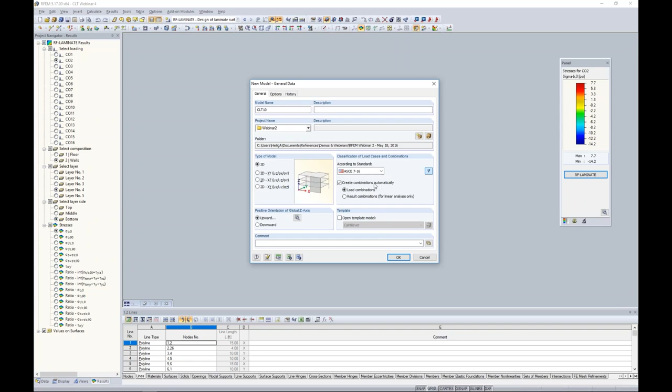The load combinations can be generated according to a standard. You'll notice we have the ASCE 7 2016 here. We have the NBC 2015, as well as many other international codes. You can always uncheck this option here, and that will allow you to manually create your load combinations instead. So once we've defined that, we'll go ahead and use the ASCE 7 2016 for our example today.

The program launches our file. We can see in the center portion here is our main graphical window. This is where we'll begin to generate the structure. Down at the bottom, we do have our tables. If you prefer to work with the program this way, you can import and export information to and from Microsoft Excel. We have our tools up here at the top, and we'll certainly be utilizing those today.

Over on the left, we have our project navigator. As we begin to generate this model, all of our input data is going to be available within this project navigator. If we scroll down, here is a long list of all of our add-on modules. Here's RF-LAMINATE in particular for today. Now, once we do run an analysis, our results will be available within this project navigator.

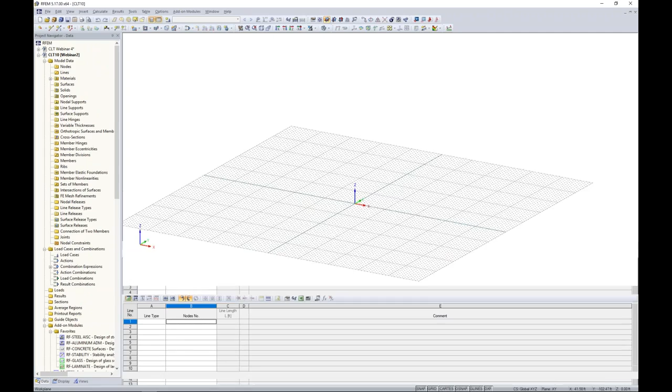To begin with, I want to start off again with just the basic geometry of our structure within the main program here, RFEM. So I'm going to draw a new line element, and it's exactly as you think. It's just a line element, something you'd see similar in AutoCAD. It doesn't have a cross section assigned. So what I'm going to do is to give the structure its basic outline here, and we're going to snap to a few different points.

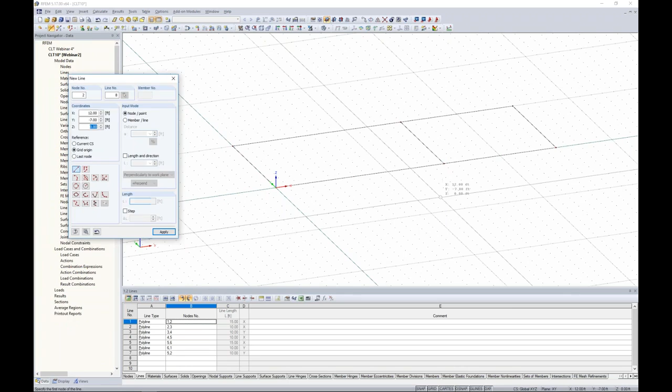And finally, closing this gap, we can right-click, and we can also repeat the new line by right-clicking, and maybe I want to add an intermediate wall here. So once I'm done with that, you can see, again, nothing more than those one-dimensional line elements.

Now, what I want to do to create the walls of this structure is to right-click on one of these lines, and we have the option to extrude the line into a surface. So this would be the 2D surface that makes up my wall element. Now, I can set the height as 9 feet. The thickness and the material don't matter right now. Steel A992 with a thickness of 8 inches is completely fine. The reason why, this is just essentially a placeholder.

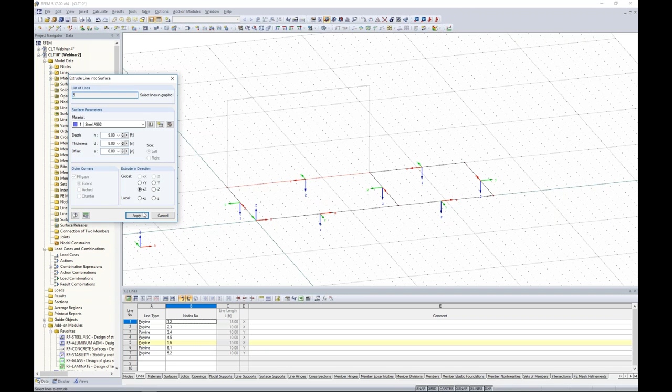We're going to define our CLT compositions later on in the add-on module RF-LAMINATE. So as a placeholder, we can just leave these as they are. Now you'll notice that 1D line element was now created into a 2D surface element. The same thing can be done for the rest of these line elements to quickly create our walls.

Now, by all means, you can draw the surfaces individually as well, which is what we'll go ahead and do for our ceiling elements here for our first level. So for this, I can just easily change my drawing grid up to the top of the structure, and I'm going to generate surfaces here.

So this time I will draw in those surfaces. The material, again, doesn't matter. Steel A992, thickness doesn't matter. It's all going to be overwritten later. So I click OK. Now this allows me just to snap to a couple of points here.

Now I wanted to place two panels side by side just to show you that panels don't necessarily need to span between certain walls, but they can be set up like this for situations where you are not able to span a single panel between walls.

Now, as for our second room over here, I will just create a single surface element and we snap from one point to the other. So that is essentially defining all of the wall and surface floor elements for our first level.

I'd like to go ahead and put in some openings here. So eventually we're going to create a second level, so I'm going to need some type of opening to get from the first level up to the second level with my stairs. So just like we drew in a surface, we can also draw an opening.

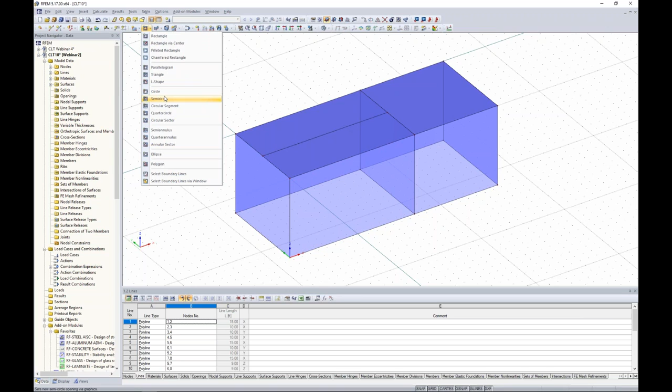In our toolbar up here at the top, you'll notice that we have many different options for shapes of openings. It doesn't necessarily have to be a rectangle, but circles, semicircles, ellipses, or even a polygon to draw the shape yourself is available. So for this one, we will just use a typical rectangular shape, and we can go ahead and just snap to a couple of points here to add in that opening for our stairs.

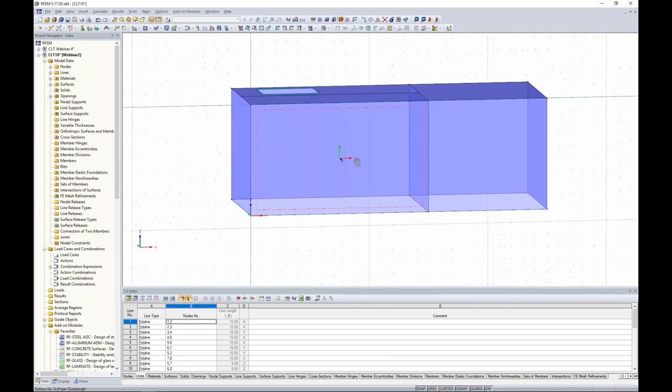Now, as far as the front of the structure, we want to change around our drawing grid here and snap to the front. And we'll go ahead and add in an opening for our window to begin with, as well as maybe an opening for a door.

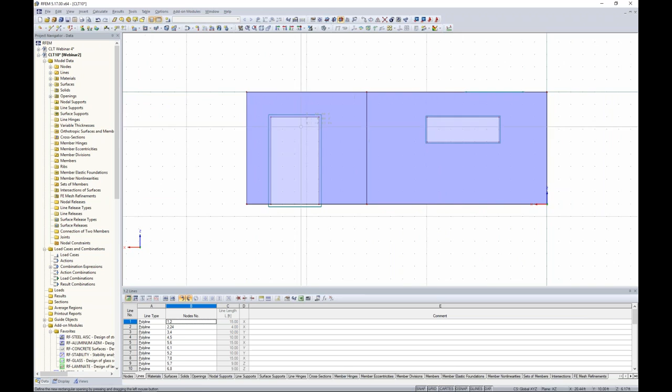So once those two openings are created, we'd like to do something similar to the back of the structure. Once again, just changing that drawing grid to the back, we rotate around the structure and just arbitrarily add in a rectangular opening for the window.

Lastly, we need a way to get in between the two rooms, so we'd like to add a door opening. So we'll go ahead and change around the drawing grid once more, snapping to that center point, and then we can add in our opening.

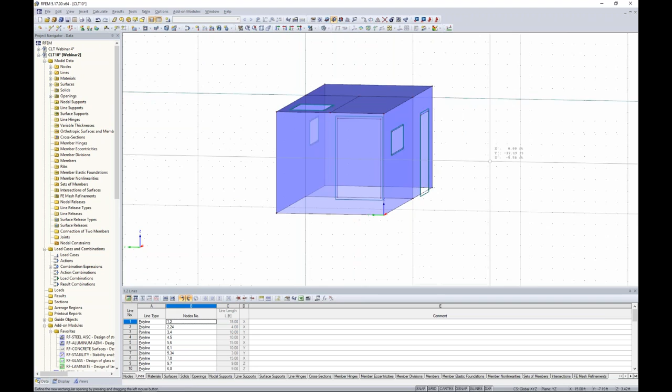You'll notice the benefit of this drawing grid, that it really doesn't matter where I'm snapping to within the model to draw all these openings, but the drawing grid limits me to where those openings are actually placed on the structure. So all of the surfaces are pretty much done.

And I'd like to generate a second level with basically the same identical layout. So what we can do is just highlight everything, and we could use our Move Copy tool, but what's nice is we also have our drag and drop feature within the program. So with this, I highlight everything, I hold down my Control key, and then I can snap from one node up to the top to create a copy with that drag and drop.

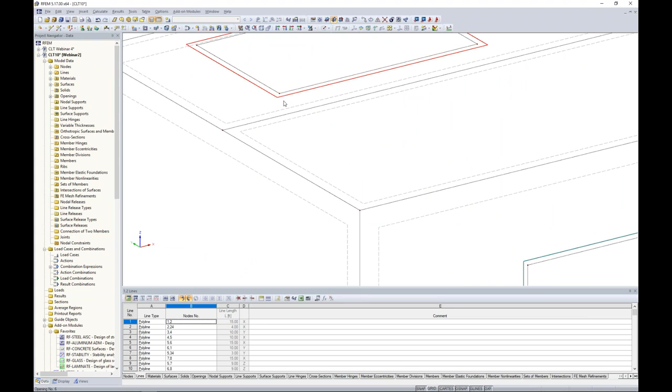So now you can see everything was copied up to the second level. Now I do want to delete a couple of these openings. This is probably easiest by turning this into wireframe view. I can zoom in here, select my top opening, just hit the delete key.

Now the nodes and lines still remain that made up that opening, and realistically you could leave these in here. They're not going to affect your analysis, but if you just like to keep the model a little bit more clean, we can just go ahead and select those with our selection tool and hit delete on our keyboard. Same thing goes for our opening of our door. We probably don't need this one in here, so again, just highlighting and hitting delete on our keyboard.

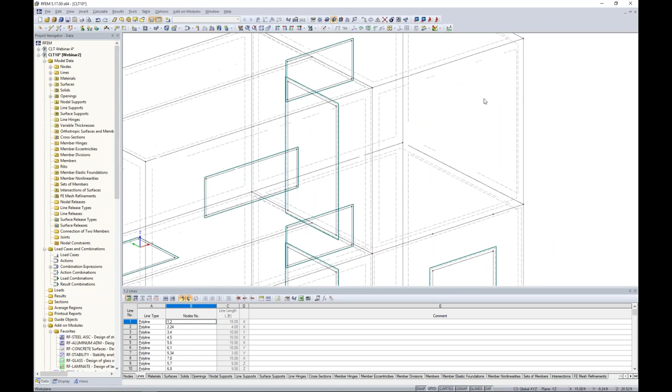So we're now done with all of these surfaces for our simple building today. Now, let's say that we'd like to model some type of beam element that will hold up the two panels here, spanning a fairly long span of 15 feet.

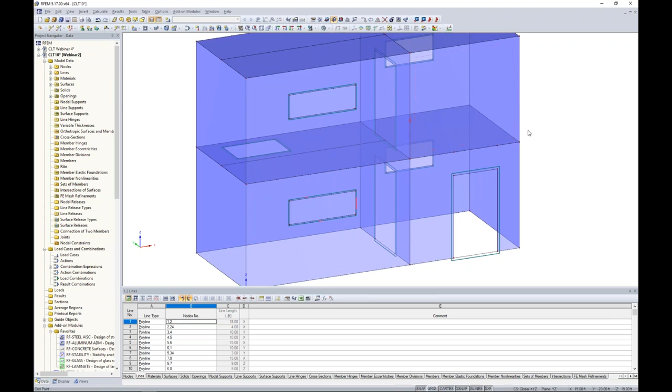Just for example purposes, let me hide this second level here by changing the visibility and hiding the selected objects. So where I want to place that beam is below these two panels that are spanning a little bit longer. So how can we do this?

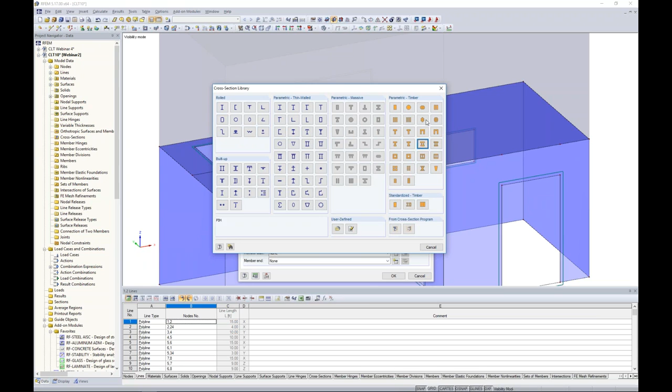Well, we can start off by drawing a new single member. Now the member type is set to beam, and we can launch our cross-section database. Here are all of the different cross-sections available in the program. You'll see all of the sections from the standards, AISC, CSA standards, but in particular today we'll be working with these parametric timber sections.

So we can choose the rectangle, set the width as 6 inches and the depth as 10 inches. The material is also set within this same dialog box. Now, today I want to use a glue-lam member.

So here I can import the material from my library. And over on the left, we have some filters, so we'd like to filter according to timber. We can choose North America, and here you'll see both the AWC and the CSA.

Then we have our long list of all the materials directly from the NDS standard. You can further filter according to the tables directly from the back of the NDS. For example, glue laminated softwood timber, stressed primarily in bending, we choose that from table 5A. Now our list is a little bit smaller.

You can always create favorites groups, which is just a way to add a handful of materials to a favorites group, so you can quickly access them rather than having to change these filters and sift through these materials every time. For example, I added my material today to my favorites group that I'll be using within the webinar. So here are all my material properties for that particular selection, and I choose OK.

So now we click OK through our dialog boxes, and it's as easy as choosing a point to snap on our structure. Again, the program has nice AutoCAD-like features, so the point that is perpendicular to my opposite node will automatically be highlighted - these are called O-snap settings, something you'd see similar in AutoCAD. So our beam element was created here.

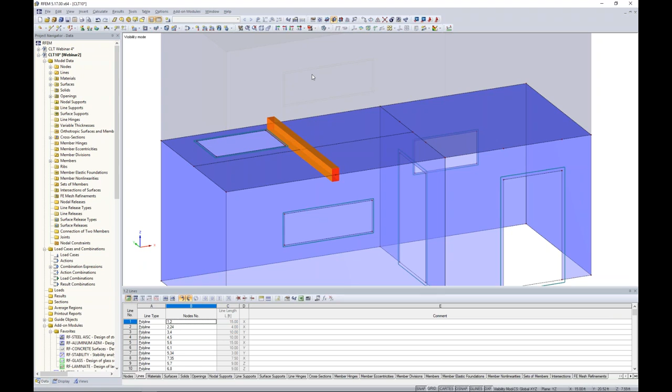Well, what we can do is to utilize something called a line release. So turning this into wireframe view, let me just break apart this member here so that member is now still spanning as a continuous member, but I broke it up into 2 segments where each panel occurs.

To add in a new line release, we can either do that within our project navigator over here - you can see line release types, or we can choose it under the insert model data, and then you'll see line release types down here. So utilizing the project navigator, we right click and choose new line release.

Now the program asks us to select the line, so I can choose my first initial line here. Then we choose the line release type, so I create a new type. You'll see here we have translation, but this is where we want to release that rotation.

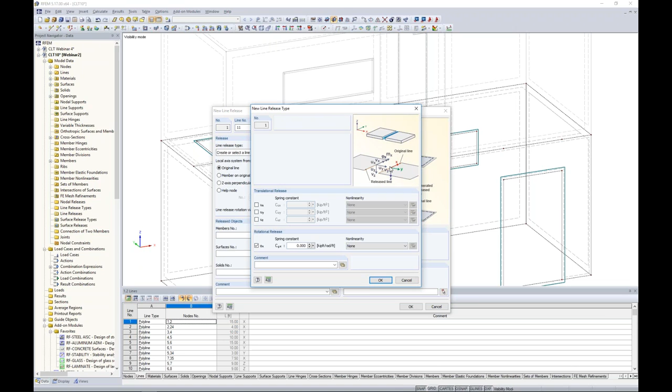Now, these axes, X, Y, and Z, are based on the local axes of the line. It is not the local axes of the beam element, and it's not the local axes of the panel, but rather the line that they share itself. So we can select the option to completely release that rotation.

The program also asks us, well, what is the released object? So we can select this surface on the far end and click OK. So now you'll see this line release symbol shown within the model.

If I right click, I can repeat that same line release, this time choosing the other line. My line release type was already defined, and we'll choose our surface closer to us, and I click OK, and now I'll see that line release to release that rotation between the 2 surfaces and that beam.

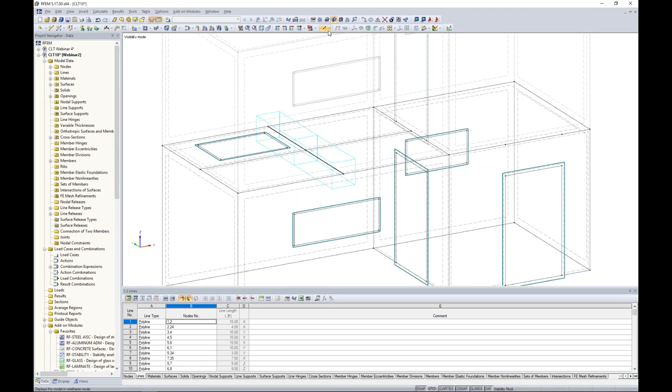The other thing to take a look at is we most likely want to drop this beam element below our surfaces.

We want to account for that eccentricity because it is holding up the beam element or the panels itself. For this, we can easily select both members for the beam. I double click it, and here is the Options tab. Now the Options tab has member eccentricity, and I create a new definition type. So what I could do is manually define what is half the thickness of my panel, what is half the depth of my beam, and manually put in that eccentricity. But rather, the program's smart enough to do all of that automatically for us.

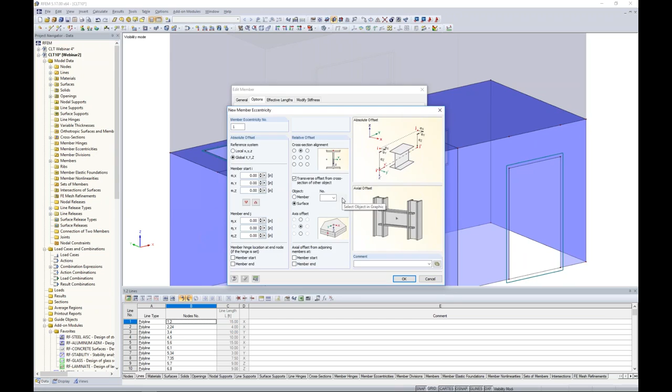So what we can choose here is the top of the beam member point, and we can offset it from the bottom of the surface. I just graphically select one of these surfaces, I choose the bottom, and I click OK. So now we can see visually that beam dropped below that panel.

What's nice here is that eventually we're going to change these steel panels to CLT. Our thickness is inevitably going to change too, so instead of having to come back here and adjust the eccentricity, the program will automatically update everything for us.

Okay, so the basic geometry is now complete. The last thing we need to do before loading the structure is to support it. At the bottom of my walls, I'd like to add in line supports. So once again, with our tools up here at the top, I can choose new line support.

We have two default options, hinged or rigid, but we can always create a new line support ourselves. Here you'll see the 6 degrees of freedom, 3 in translation, 3 in rotation. We have the option for partial fixity, so if you have something that's not fully fixed, not totally released, but somewhere in between, then you'd probably want to add in here a spring constant.

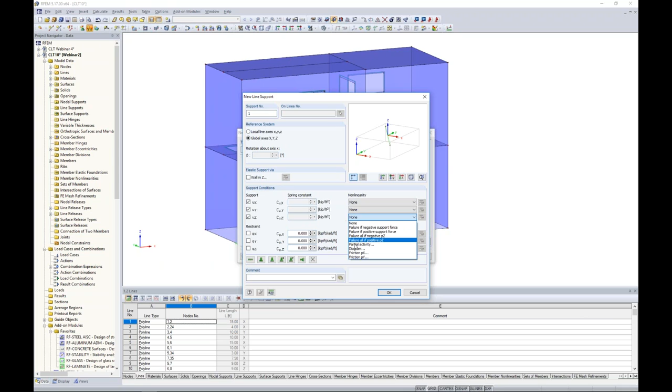And lastly, nonlinearities. Nonlinearities can be extremely useful for wood panels and CLT panels here. The reason why is that maybe in compression we would like the wall to bear down on the foundation, but with any uplift, we'd like to release those force transfers, and instead model in there some hold downs. So that's where those nonlinearities would come into play.

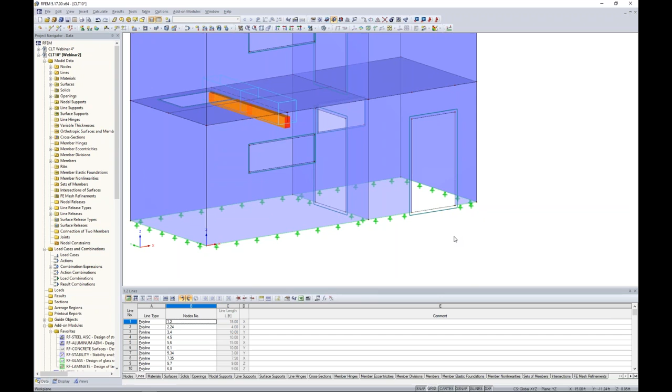Today we'll just be utilizing a simple hinged line support, and we can select all of our lines at the bottom of the structure. Now, one thing we want to do is select the two line supports where our door openings are and delete those. The reason why is the program will give us an error just saying that we're trying to support something that doesn't exist, so we'll just preemptively take care of that.

So geometry and supporting of the structure is done, so we can move into the basic loads. For this, I'm going to go into a new load case. Here pops up my Edit Load Cases and Combinations dialog box. The first load case we're going to define is dead load.

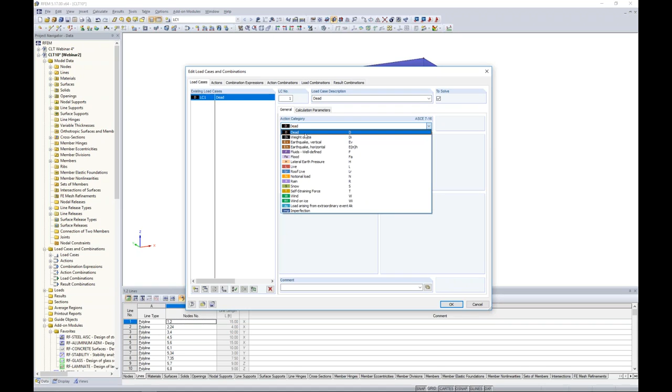The action category is set to dead load. This is important because this is how the program knows which load factors to assign according to the ASCE 7-2016 that we selected at the beginning of the model. The self-weight is automatically activated for dead load.

We create a second load case. We'll call this one live, with the action category set to live. Self-weight is unchecked here, we don't want to account for it twice. Third load case, we'll call this one wind X with the action category set to wind. And finally, our last load case will be wind Y, with the action category again set to wind.

So the combination expressions tab is just going to show me that I'm going to create both LRFD and ASD load combinations, again directly from the ASCE 7. The load combinations tab actually lists out the individual combinations.

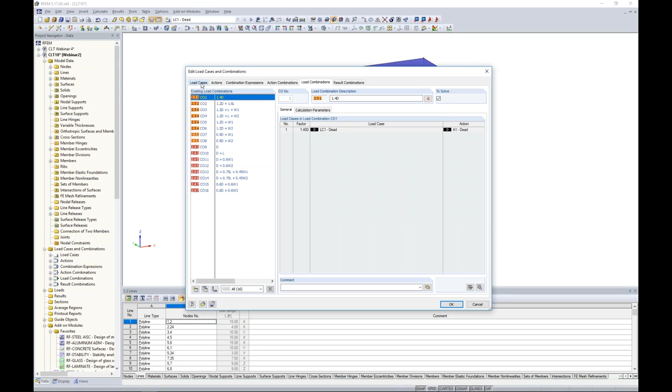So here are my LRFD load combinations in orange and ASD in red. Now these only include the load cases that I've defined on that first tab, which is dead load, live load, wind load. I won't see additional load cases such as snow load when I haven't defined them on that first tab. The result combination is an envelope solution, so we have our LRFD envelope solution here for our first result combination, and ASD result combination here. This will just show us the max and min out of all of these load combinations combined.

So we've completely set up our load cases and our load combinations, but we need to actually place the loads on the structure.

So we'll start off with dead load, and here we'll just apply a basic surface load, once again accessing this tool at the top of our model. The surface load direction will be set in the global Z direction. We can see those global axes here with the magnitude set at negative 0.1 kips per square foot. I can just click on those surfaces, or highlight the first level here to apply that same load. You'll notice that the openings are automatically considered, and our dead load is complete.

Same thing for live load, same concept. We'll go back to our surface loads here and simply change the magnitude to negative 0.05 kips per square foot, and we'll only apply this to this first level here.

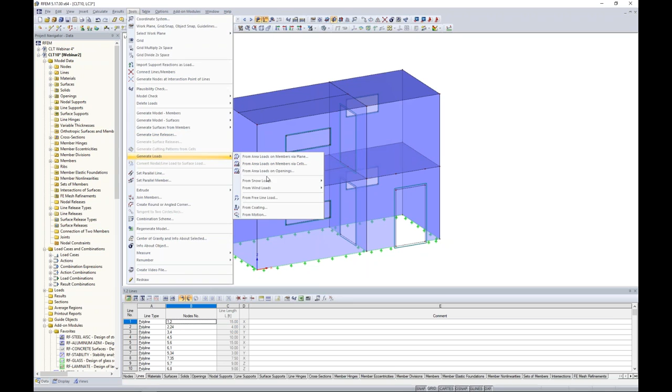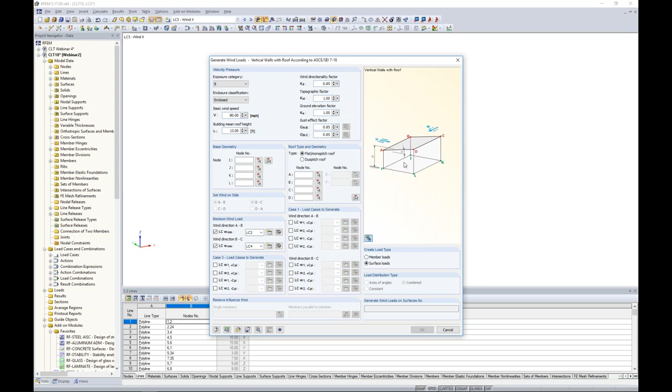Moving on to wind load, under Tools, Generate Loads, for both snow loads and wind loads, we do have the option to generate these according to ASCE 7-2016. The wind loads only take into consideration case 1 and case 3 from the standard, and realistically, this is for basic rectangular structures only. Anything outside of that, you're going to have to manually apply the loads. This will apply them as either surface loads or member loads to the external elements of the structure.

So it won't be placed on a diaphragm as a nodal load, but rather the actual loads themselves. Just keeping with a simple example today, we're going to apply basic surface loads for our wind in the X and Y. Going back to our surface load, all we're doing here is changing the load direction, and the magnitude can be set at 30 pounds per square foot.

Now, you can vary the load linearly in the vertical direction. For example, if we want higher wind load at the top, lower wind load at the bottom. And these loads don't necessarily have to be applied to the entire surface either. We have free loads, which allow you to apply surface loads to only portions of your surfaces. So the possibilities are really endless when it comes to loading here.

So we just apply a basic wind load in the X direction. Now, I'd like to maybe have a small suction load on the other side. We'll simply change the magnitude to something more like 10 pounds per square foot and apply that on the other side of our structure. So pretty basic application today.

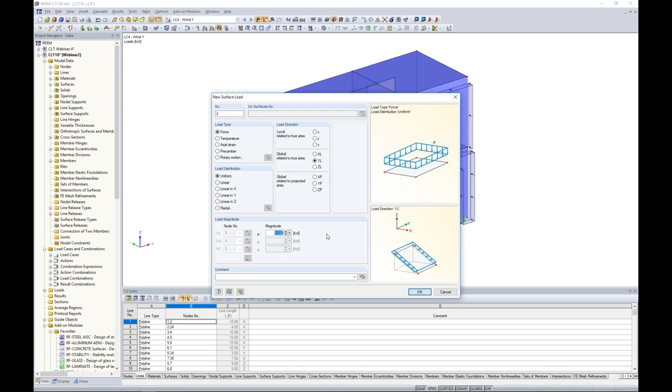Moving on to wind in the Y direction. Same concept, just changing the load direction to Y and the magnitude to 30 pounds per square foot. We click on these front surfaces here. Again, you'll notice that the windows and door openings are automatically accounted for. And one more time, a small suction load in the back, 10 pounds per square foot, and we can always highlight all of these surfaces at once to apply it to the back side of our surface. So that's the basic loading.

Now we can cycle through these load combinations here to see them all applied at once. What's also nice is that these load factors are automatically considered in the graphical interface here when we're displaying the loads on the structure.

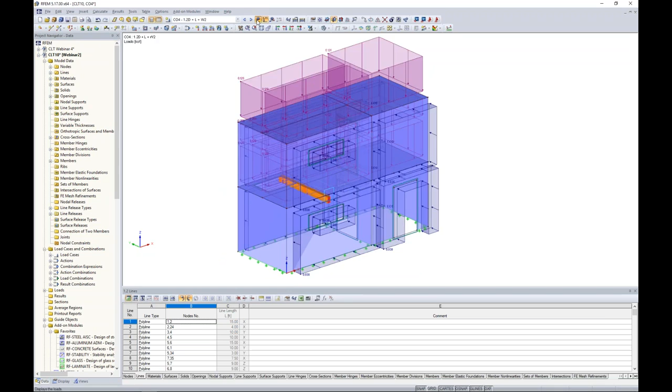Okay, so you would think that, alright, we must be already ready to run our analysis, but remember, we still have steel surfaces here. We haven't even touched the definition of our CLT panels. So this is where we want to launch the add-on module, RF-LAMINATE. I can access this add-on module within my project navigator here, and we double click it, and up pops a dialog box. The add-on modules are nothing more than a dialog box within RFEM.

Everything that I've already modeled and loaded so far will be considered. I don't need to redefine any of that information. The only thing that I'm defining here is information specific to the NDS standard and to cross-laminated timber. So I want to fill out a few things here before I explain what's going on with the RF-LAMINATE add-on module concept. The first thing we'll choose here is design.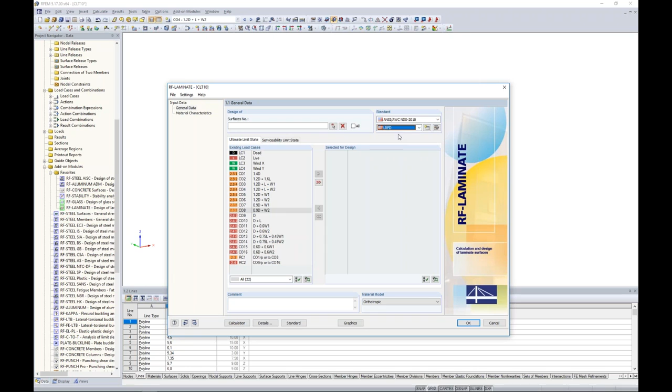You'll see the NDS 2015, and as of our last release, we added the NDS 2018. We have both ASD and LRFD. Maybe today we utilize LRFD. Our surfaces, we can choose all the surfaces here, so you could select some graphically if you only wanted to design a few, but for today, we're going to design all of them. Our ultimate limit state combinations, we will choose all of our LRFD load combinations, and for serviceability, we will choose ASD because again, we can check deflections.

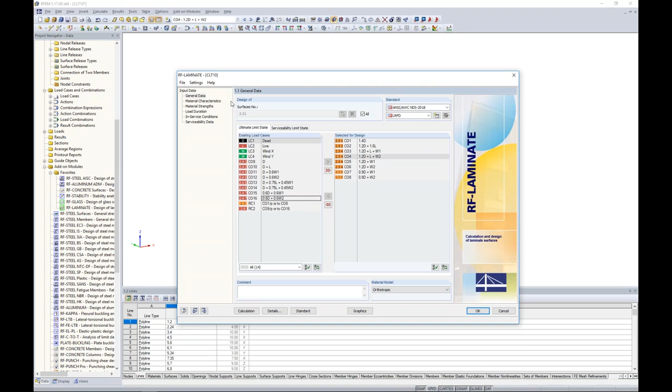So the material characteristics, this is where we define the CLT compositions, those individual layers that make up that CLT panel.

And this is where I want to go back to the PowerPoint here to explain what's going on behind the scenes. So with RF-LAMINATE, as I just mentioned, we're going to define each individual layer of that panel. Now, each layer has its own stiffness matrix.

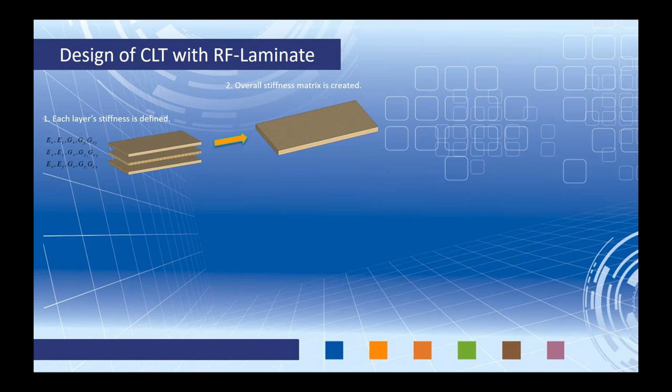So what the program will automatically do for us once we have filled in all of the layers, it will generate an overall stiffness matrix. And you can see a sample calculation here, D11 of that stiffness matrix based on all of the layers that we've entered in. It will export this global stiffness matrix back out to RFEM, and this is where we're going to see CLT panels instead of those steel surfaces that were our placeholder.

It's going to run through all of those load cases, load combinations, and eventually we're going to get internal forces. These internal forces for our CLT panels are going to be brought back into RF-LAMINATE, where the stresses are distributed to each individual layer. So maybe a cross-section profile here of a CLT panel for bending stress might look similar to this. And finally, we're going to separate those stresses into tension, compression, bending, and shear components.

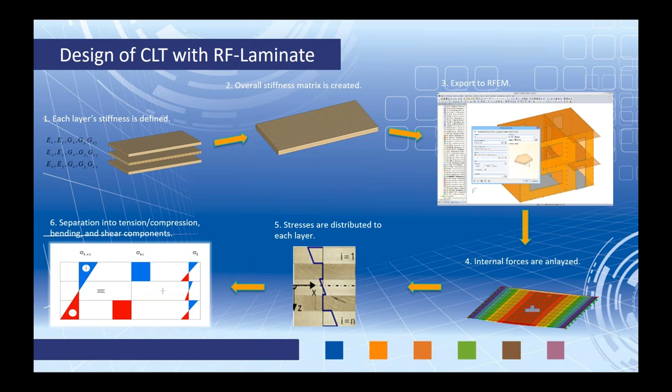We're going to compare them to our strengths of our CLT based on the NDS standard, and we're going to give you a design ratio. So that's essentially what's happening underneath the hood.

Now, as far as the 2018 NDS updates, what exactly changed? In reality, there were only 2 revisions in Chapter 10 for CLT. The first being the format conversion factor K sub F, and this is applicable for the rolling shear design value F sub S within LRFD design.

Now, within the 2015, this was 2.88, and it was simply adjusted to 2.0. You can see this within Table 10.3.1 of the 2018 standard, and within RF-LAMINATE, when you have the 2018 selected, it will automatically take into account that small change.

As far as the second change, it actually is a little bit more complex. So deflection calculations are run according to Section 10.4.1. And what the NDS code tells us is that the apparent bending stiffness must be adjusted to account for shear deformation, and this is what you're seeing over here with this equation.

So in order to calculate deflections, we should use this stiffness. And this is pretty much an approximate equation, done by reducing the bending stiffness EI with a shear deformation adjustment factor K sub S. So we can see all of that here.

So this equation was slightly modified, and it matches up a little bit more closely to the CLT handbook, but that's really the only second change.

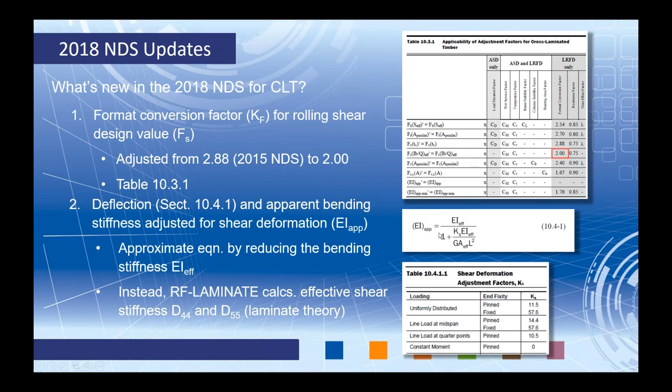Okay, so let's jump back to our example here, and let's begin by defining our first composition. So what we'll first define here are our floor panels. So we give this current composition a name. We choose these surfaces, which we can choose them graphically here. We'll choose our roof level and our first floor level, and I click OK.

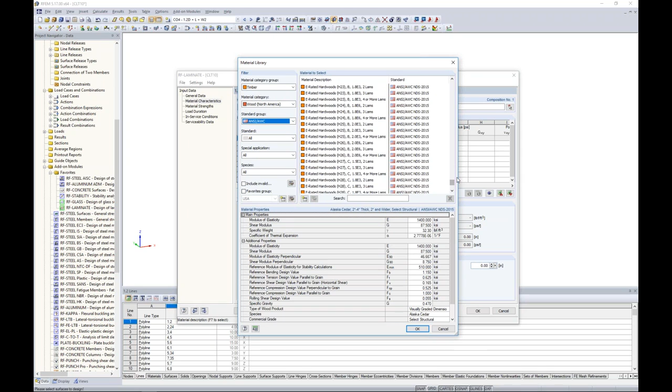Now, as far as the different layers, you can individually choose these layers here by going into our material database, and this is what we saw similar in RFEM. The material category can be set to Wood North America. We have AWC and CSA here, and then we can choose one of these materials that's applicable for our first layer. So that's one way to do it. We can set the thickness, and then all of these properties will be generated automatically from that particular material.

Another option is to bring in imported layers from our library. Within this library, you'll see we have a handful of producers we've reached out to. They gave us information for their products created for CLT, particularly for the Canadian and US market. You'll see here the APA.

We'll see Nordic Structures, Structurlam, and SmartLam. You can always import one of these products directly from the manufacturer if you're utilizing one of them. Today we'll be using the APA for the US, Grade E2, thickness 6 7/8. Now you can see all of these layers were automatically populated within this dialog box.

If you create your own individual layers, you can always save them and bring them up for a future model within RFEM. So there are a lot of options here — you don't necessarily need to individually define those every time.

The modulus of elasticity, shear modulus, specific weight, and everything is automatically populated here, based on the producer we're utilizing. The material strengths are also automatically populated — here are strengths for bending, tension, compression, and shear.

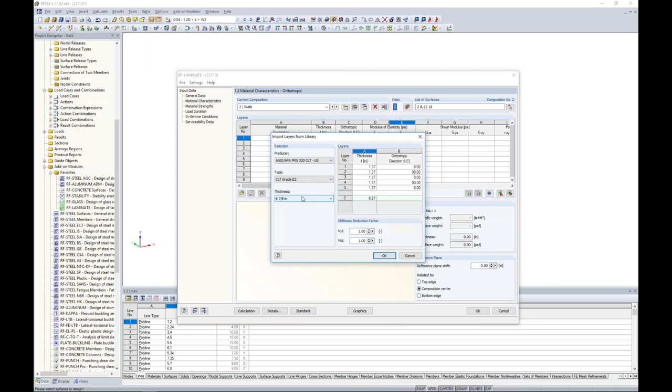We go back to the add-on module and populate from this same database, using the same grade E2, 6 7/8, which is fine for our case today. And I click OK.

One thing I'd like to point out is this option here to edit the composition details. This is applicable for both the floors and the walls, and there are quite a few options here to turn on or off or adjust.

You'll notice we have consider coupling, cross-laminated timber without glue at the narrow sides, shear failure in the glued contact surfaces, as well as stiffness reduction factors. So to explain all of this — although it looks pretty simple, it's actually fairly complex what's going on in the background of RF Laminate.

I'm going to jump back to the PowerPoint to explain some of these settings. They're incredibly important for us as engineers because we need to input the right information in order to get a correct analysis.

The first option is consider coupling. This is automatically turned on by default, and the reason is we're making the assumption that these layers are glued to each other at both the top and bottom.

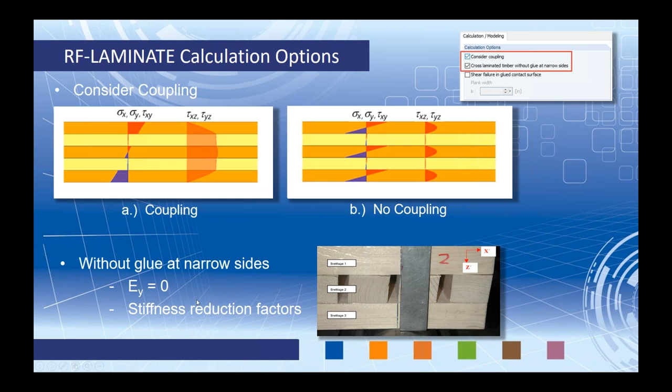When you have this option checked, we'll automatically set the modulus of elasticity in the local y direction of the panel to 0, assuming you have no stiffness in that direction. With that said, those stiffness reduction factors also need to be adjusted, which takes us to our next slide.

Without glue at the narrow sides, it's strongly recommended that your K33 and K88 stiffness reduction factors be modified — K33 for torsional stiffness, K88 for in-plane stiffness. The NDS and the CLT handbook don't give much information on how these should be reduced when we don't have glue at the narrow sides. So I pulled this information from the Austrian Annex, which is the Eurocode EC5.

I think we all can admit that Europe is a little bit more advanced when it comes to CLT design, simply because it's been around a lot longer than what we've seen within the US or within Canada. So I think it's perfectly fine to refer to the Eurocode when there are portions in the NDS or CSA that maybe aren't so complete.

Within the Austrian Annex, we have some simple equations for K33 and K88, those stiffness reduction factors. This is an Excel file I got from one of my colleagues, and what it allows us to do is put in the total thickness of our panel, the number of layers, and the board width, and it calculates K33 for us. This is the value we want to put back into RF laminate when we are not considering glue at the narrow sides. Same thing goes for K88.

By default, these are set to 1.0 even when you have this option checked, simply because there isn't any guidance given to us within the NDS standard. So again, it's strongly recommended to make sure you reduce those stiffnesses.

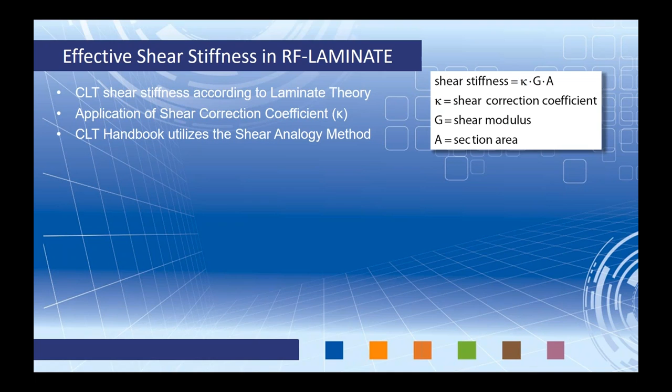With this, we're going to apply a shear correction coefficient. The CLT handbook actually utilizes the shear analogy method, which is different than the laminate method. Both of them eventually come up with a reduced shear stiffness, and that's ultimately what matters. Either one, by theory, is probably considered fine, but within RF laminate we're going to use the laminate theory, applying the shear correction coefficient to our shear stiffness, G and A.

Now, when we're looking at a homogeneous rectangular section, it's pretty common to set this shear correction coefficient to 0.8. We can see the shear stress distribution as a parabolic type function. Well, with CLT, we don't have that parabolic type function because it's not a homogeneous section.

Therefore, through research, there are some recommendations on what to use for that shear correction coefficient, whether it's 3, 5, 7, or 9 layers — we have some ranges here to set that to. But the question is, if I have 5 layers, like my example today, what exactly do I set this factor to within this range? Either the low end or the high end? What happens if I have 11 layers? What do I use then?

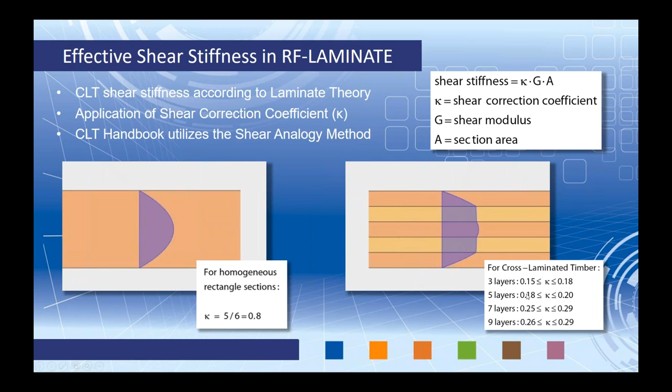So we will actually take you to the next slide to show you how these shear stiffness calculations for the XZ and YZ directions are calculated according to general technical regulations. Here are the equations for the shear correction coefficient, and we can see how that shear correction coefficient comes into play when calculating the D44 and D55 stiffness matrix entries within the CLT panel.

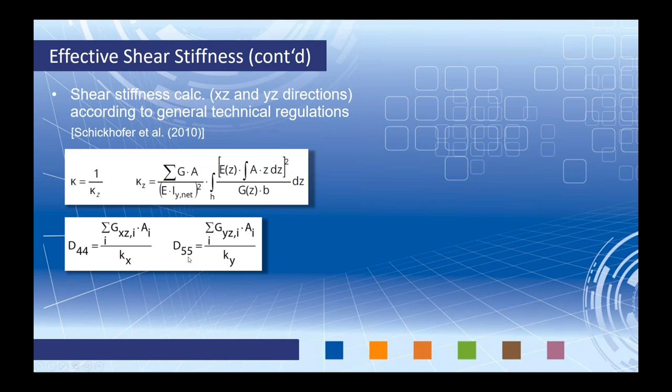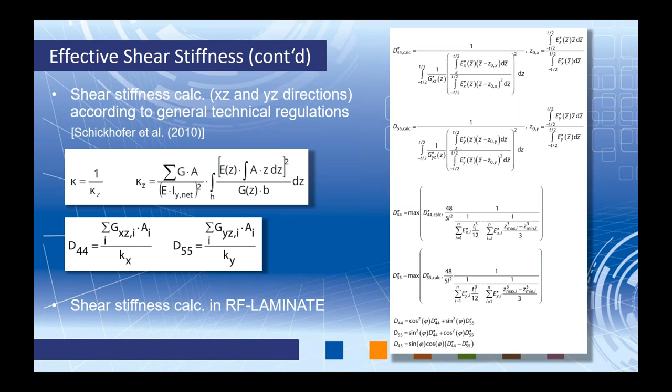Now, within RF laminate, here are the complex equations that go into calculating D44 and D55 — this is how the module calculates those stiffnesses. This is all within our help manual within RF laminate, so you do have access to all these equations and the theory behind the module. I'll show you in just a minute how you get the values of D44 and D55, and you can back-calculate to come up with the shear correction coefficient for that particular panel. All of that is done automatically, which is why you rarely will need to adjust the shear adjustment factors for K44 and K55, because it's already being done underneath the hood.

Finally, the last option we have here is shear failure in glued contact surface. This is for a new torsion check, just added into the program within our last release. It's mainly for wall elements which are loaded in plane — I think we can imagine with gravity loads and wall elements how torsion could potentially be a concern.

It's considered without glue at the narrow sides again. One suggestion is to make sure we set our FE mesh within our model to approximately the same size as our board or plank widths. We'll be doing that a little bit later on in our example, but it's important because your results could be a little bit skewed if you choose an FE mesh too small or too big.

So just something to keep in mind - this verification comes from the Eurocode EC5 2010 version. The NDS and the CLT handbook don't mention torsion and don't go into detail about how to take that into consideration, so we pulled these complete interaction equations from the EC5.

So what we can do is activate the shear failure, and you'll also want to turn on your results for the torsion checks. These interaction equation results will now be displayed in RF laminate, but we have to manually turn those on. They're still going to be calculated - it's just that you can see how many options here you can view with your results in the laminate module. We don't want to overwhelm you, so we'll be sure to do that as well.

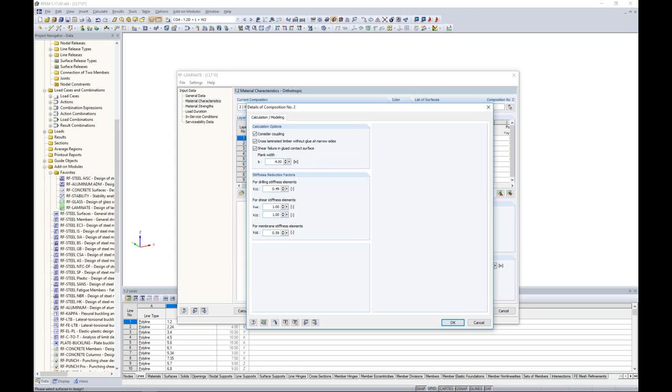Okay, so we're finally ready to jump back to our example, and here we are back to that original dialog box. So I'd like to set the plank widths to 4 inches, and for my walls I want to reduce that stiffness to 0.49 for my torsion, and for my in-plane stiffness 0.59, and that was all based on the PowerPoint that I just went over, and I click OK.

So now for my walls, I've only made those changes to the walls. My floors, which we can pull up in here, remain unchanged - I'm not applying those stiffness reductions. But for each individual layer, I can view its stiffness matrix here.

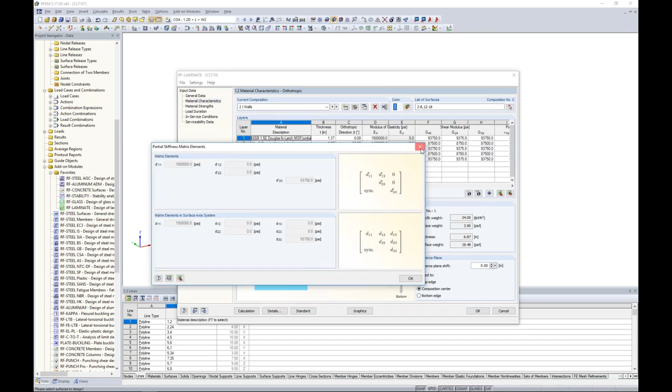And just like what I mentioned, the program is automatically creating my global stiffness matrix here for the entire panel. So here's my D44, my D55 entries that I mentioned. You can eventually back calculate to see what that shear correction coefficient is, but everything is done underneath the hood, taking into account those adjustment factors.

As I mentioned, let's take a look at the material strengths here. Because we're now taking into account torsion, we will see a torsion strength added to our material strengths table. This is something maybe you want to get from the manufacturer - this is just some arbitrary value. It's not something that came from the manufacturers that we populated from these layers, because we don't have that information, but rather it's something you need to manually fill in. Everything else should be good to go.

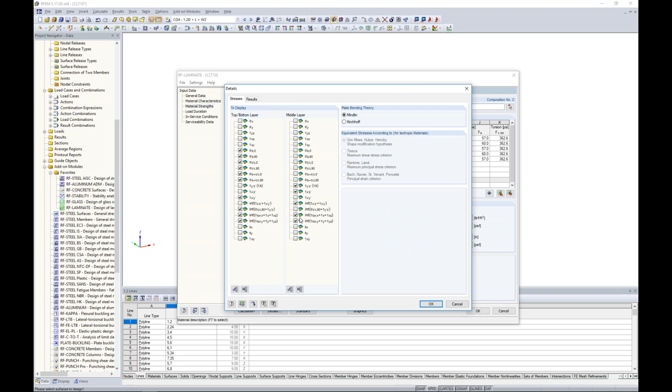Finally, under the details button, this is where I said you may want to activate the results for torsion. If we're checking for it, we want to see what that design ratio is, so turn those on, and those will be seen in the results.

So finally, moving on down our list, we have our load duration - this is for load duration factors directly from the NDS standard. We have in-service conditions: is our panel dry, is it wet, what's the temperature. And finally serviceability, so we can check deflections for these CLT panels as well.

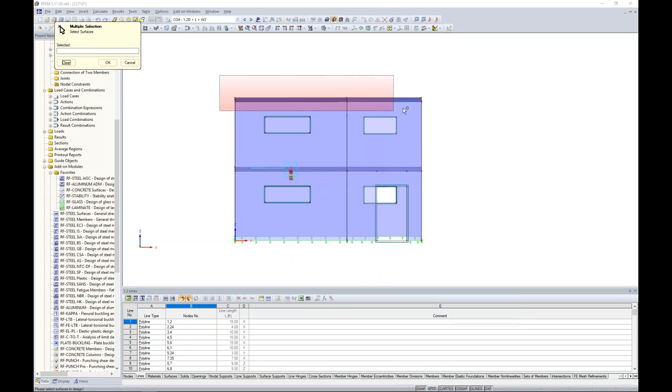So what I can do here is, I'm probably most interested in my roof panels and my first floor panels for my deflection checks. I click OK.

The reference length - well, what is this referring to? Under the standard button, we see here serviceability limits, and this is our limiting deflection ratio. L over 360 is used for simply supported, and we have L over 180 for cantilevers. By all means, you can adjust these - these are just default values. So this is the L that we're referring to here.

Now, either you can use the minimum boundary line of the surface, the maximum, or some user-defined length. Today we can just use the maximum, for example, of 15 feet.

So we're almost ready to run the calculation, but there's a couple more things that we need to take care of. So jumping back to the material characteristics, this is my wall composition, and we have 5 layers.

Now, the orthotropic direction here is in reference to the local x-axes of my panels. So I have layers 1, 3, and 5, which are oriented 0 degrees from my local x-axis. This is most certainly the strong axis of my panel. I probably want to make sure the panels are oriented with the local x-axis in the vertical direction to take those gravity loads. Otherwise, we're not getting as full use as we could out of those panels if we orient it so that our strong axis is in the horizontal direction.

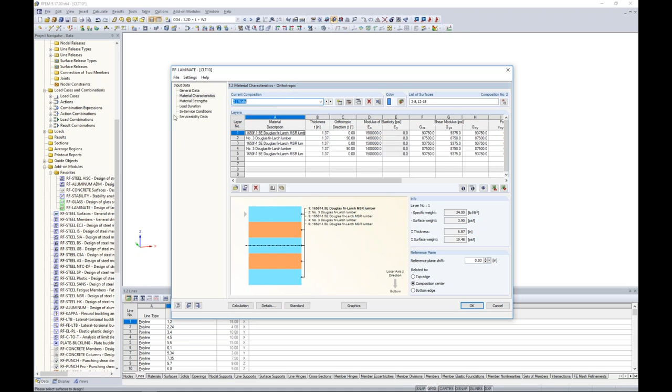So how do we check this? Well, we can go back into RFEM, and the first thing to notice is that our panels are no longer purple for steel. Rather, we double click on them, and they're now considered with the stiffness laminate, and we can see the material is now set to RF laminate.

So I can right click on any one of these surfaces to display the local axes, and I zoom in here. Well, the local x-axis is exactly what we don't want it to be. The strong orientation is facing horizontal right now. We want to rotate that 90 degrees so that the strong orientation of the panel can take those gravity loads.

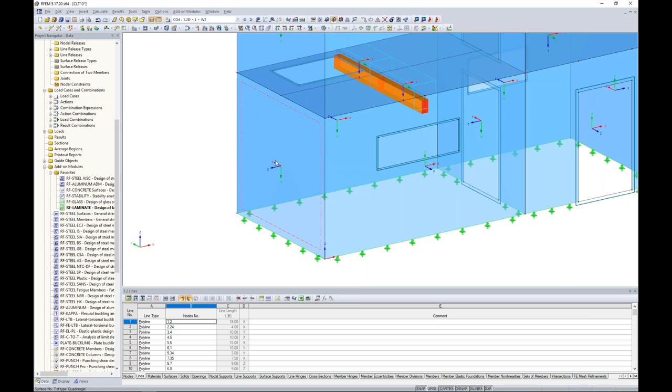So how do I quickly rotate around all these panels? Well, for this, I can select all of my wall surfaces here, and I can double click on them. We have a tab called Axes.

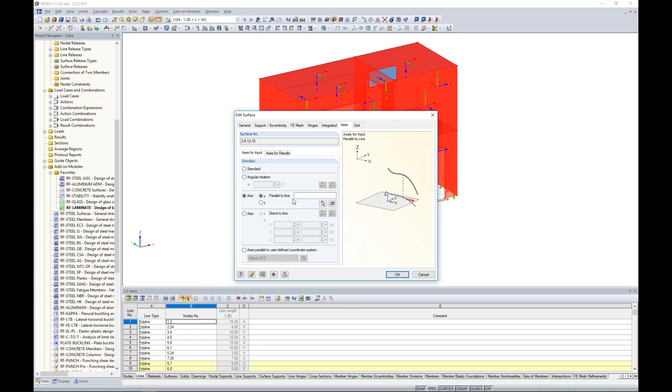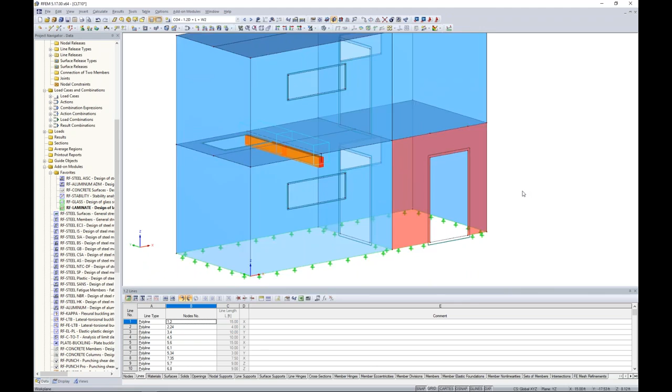What this allows me to do is change all of my local x-axes parallel to a line that I simply choose in the model. So it's any arbitrary line, and maybe I choose this one in the center because it runs from the bottom to the top. I choose it, I click OK. I click OK once again, and now all of my panels are facing in the vertical direction with the local x-axes, so the strong orientation is now taking on those gravity loads. So it's incredibly important in terms of which orientation our panels are facing.

The other thing many of you are probably thinking of right now is that we currently have fully fixed connections between all of these CLT panels. Well, we all know with CLT that this is definitely not the case. Rather, we're going to screw these panels together, and with screws, we want to release the moment. We also may want to account for some slip of the screws, maybe at this location in the vertical direction we have some movement.

So how do we account for the CLT connection from one panel to the next? Well, we'll do this with something called a line hinge. Now, a line hinge can be accessed here in our project navigator, or again we can access it under model data, insert line hinges assigned to lines graphically.

Now, line hinges are similar to our line releases, which remember we applied to our members, but they're also different. We're actually going to modify the FE mesh elements at this location of the line hinge. So meaning if we want to release the moment, we're going to set the stiffness of the FE mesh at that particular point to something very, very small so that we're not going to see the bending moment. Whereas a line release is exactly what it sounds like - it's completely releasing and not adjusting the stiffness of the FE mesh.

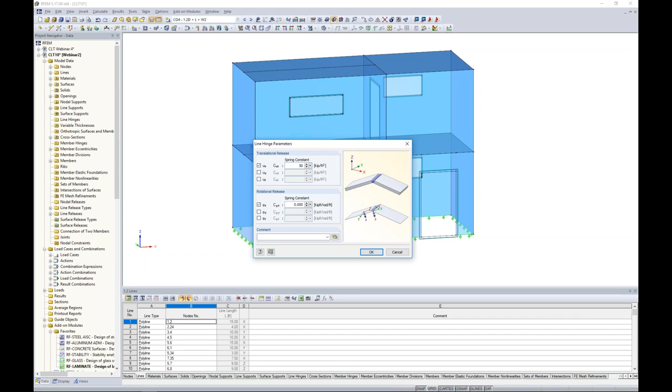So as far as the line hinge definition, it looks similar to a line release. We want to fully release the moment here. Again, these are based on the local axes of our line element, not of the panels. We also want to account for some slip, so this is along the local x-axis of our line element, and we can put in here a spring constant of 50 kips per square foot. So now we're going to get some movement along the line length here, and I click OK.

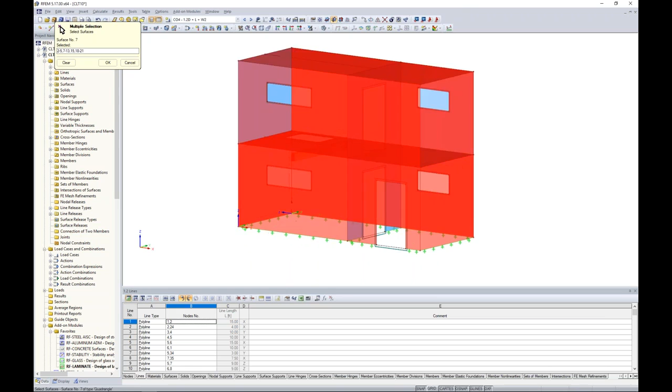I'm going to choose the option to select the surfaces and have the program automatically assign the lines. I think that this is quickest. So I'm just going to make a selection here of some of my panels, and I'm being a little selective, and it will make sense why I'm doing so in just a minute. So I click OK, and we apply those line hinges. We can now see the line hinge symbol within the program.

So when I zoom in here to the line hinge location of these two panels, what I see is both hinges on either side. Now, with any finite element software, whether it's RFEM or anything else, we know that if we have two beam members framing in at a joint, and those are the only two beam members that exist, and we set the end rotation of these beams to be released for moment, we're going to get an instability. You never want to set both beams in that case to pin. You want to leave one at least fully fixed, otherwise we get instabilities and can have issues within the program.

Well, the same thing goes for panels. At these locations, we want to have at least one fully fixed panel.

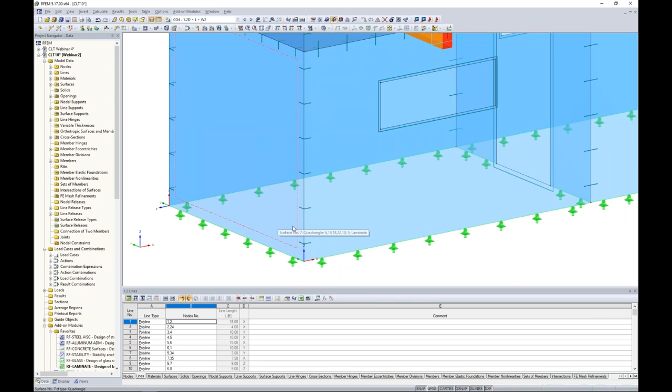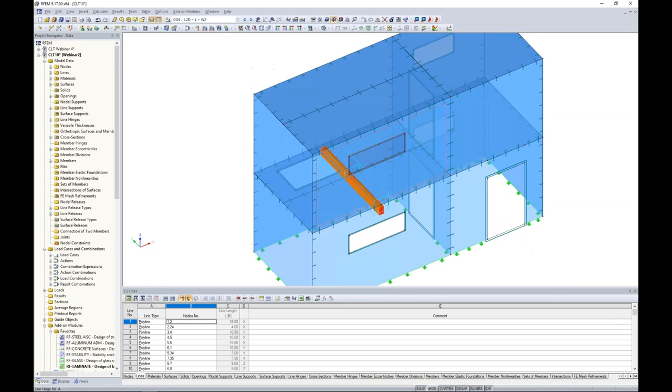So this is why I can hold down my control key to select some of these line hinges and hit delete on my keyboard, and as we see, we only have one line hinge defined at that joint. Same thing goes for the other side. We select some of these locations where we have too many line hinges defined, and up at the top, same thing. Otherwise, we want to avoid those instabilities. Holding down my control key, I'm just deleting some of them, and finally over here on the right hand side.

That takes care of the roof element, but we also want to select our second level here. We'll hide the visibility of that level, and we want to make sure that we address the line hinges at this ceiling level here. We'll just go ahead and select them graphically, because otherwise we have too many line hinges defined. Hit delete, and one more time on the far end here.

Okay, so now we have completely finished the geometry of this structure. Loading, we've defined our CLT panels, so we're finally ready to run the analysis.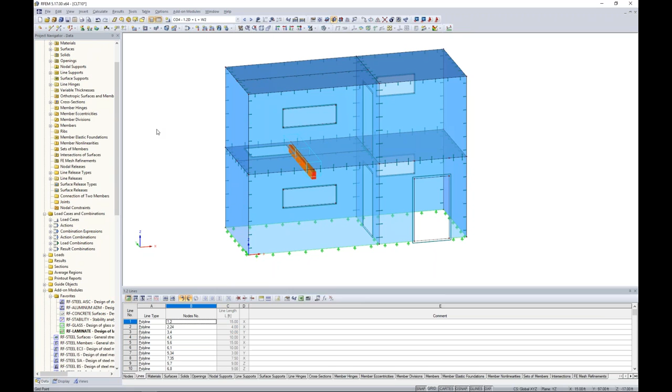Now, actually, one more thing I forgot. Remember within the PowerPoint, I said that we should really set the FE mesh for torsion, when we're doing torsion checks, approximately equal to the plank width for each individual CLT layer. So for my wall elements, I need to adjust my FE mesh. We do have FE mesh refinements in the program, so I can individually change each wall panel's FE mesh.

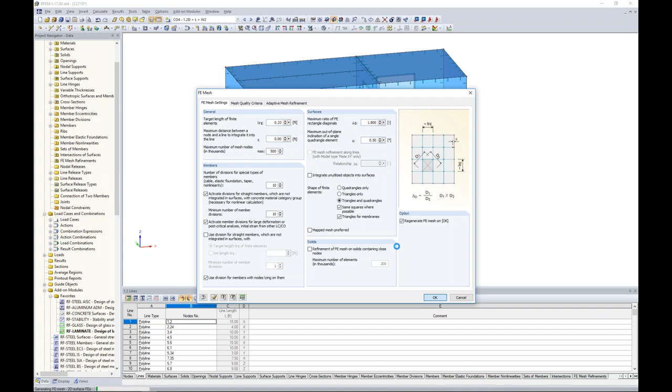FE mesh refinements are also available for line elements, nodes, anything of the sort. But instead, under Calculate FE Mesh Settings, we can just change the global FE mesh, which by default is set at 1, to something more like 4 inches, because that's the width of my planks. We can regenerate the FE mesh just to see how it looks, and the program does everything automatically for us. So everything's tying into nodes, to openings, to panels, to line releases automatically.

If we make any changes, the program will automatically do this every time we run a calculation. So quite powerful when it comes to finite element capabilities.

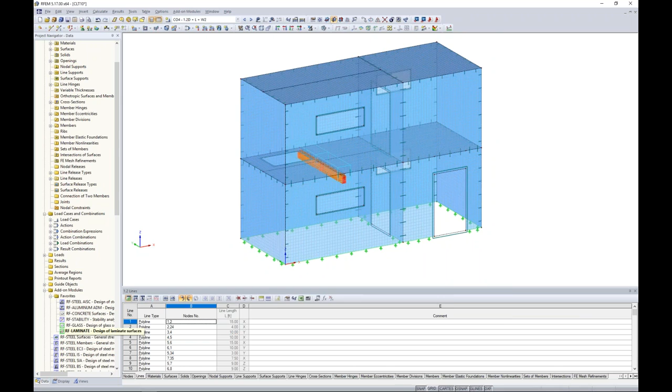So now we truly are ready to run the analysis, and we can go back into RF-LAMINATE if we'd like to run the calculation here. Now, because I have slimmed down the FE mesh a little bit, this actually does take just a minute to run. So I wanted to jump to an already saved model here where we can launch RF-LAMINATE.

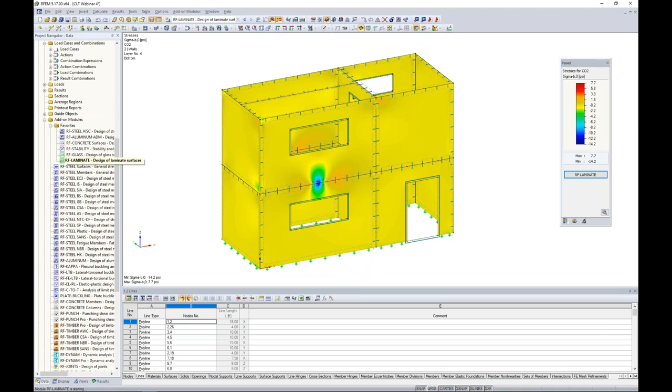This will take just a second to load all of the results. It doesn't take too long, just a minute. You can see here it's having trouble pulling up all the results, but eventually, here we are. We're presented with the results within RF-LAMINATE. So after you run the calculation, you're going to see your results tabs available here, results tables.

We can view the max stress ratio by loading. We can view it by surface. We can view it by composition. So maybe if we take a look at the results by surface, and I drag down my table down here, you'll notice that everything is synced up in the background. The program is actually highlighting the surface that I'm currently looking at in the table, and it also has this big red arrow. That red arrow is showing me exactly where the controlling internal forces for that stress check are located.

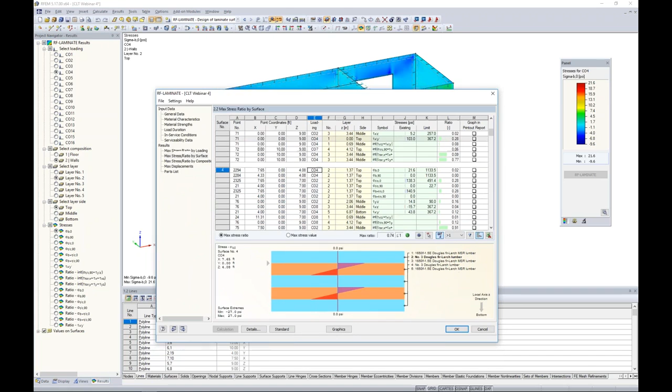In addition, we can view this table here for surface number 4. We can view bending stresses. We can view tension and compression. We can view the shear. Here is the stress distribution throughout the cross-section of our CLT panel. And finally, you'll notice here that we have torsion checks as well for all of our wall elements. So for any one of these, we can scroll through and see the details of the stresses.

Now, we're ultimately getting a max ratio check here of 0.74. We have a nice green smiley face because it's telling me that, okay, everything passes with all of these CLT panels according to the NDS standard, and we're below 1.0. We can always export any of this information directly to Microsoft Excel if we'd like to further sort it.

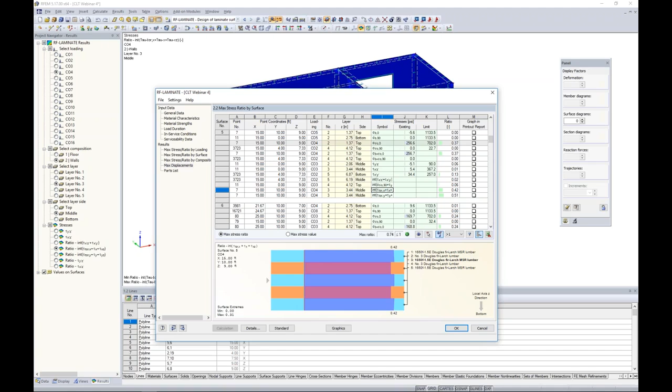Now, this is all included within the printout report as well. So taking a look at the rest of the tables, the max displacements, again, we're also doing a deflection check. We can remember this. Here are my deflections based on the analysis from the load combinations I've selected. Here is my limiting deflection, which is based on my limiting deflection ratio, L/360, which is what I set it over.

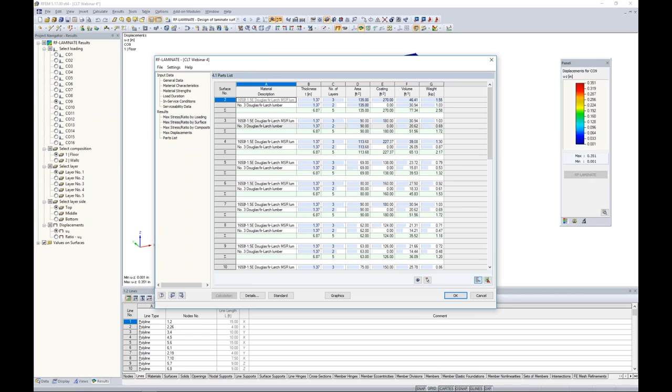So my limiting deflection is 0.5 inches. Again, we get a different deflection ratio check here, 0.7, again below 1.0, so we're seeing our green happy face. Lastly, we see a parts list, which is nothing more than a material takeoff. Again, you can export this information to Excel. So these tables are very informational.

Again, under the details tab, this is where you can turn on and off some of the different stresses that you're interested in. But it's also nice to see our information graphically as well. So for this, we can always jump to the graphics view here. Technically, I'm still within the RF-LAMINATE add-on module, but I'm viewing my results graphically within RFEM.

So what this allows me to do is you'll see here all of my load combinations that I've solved for, both LRFD and ASD load combinations. So we can easily jump to any one of these load combinations within our project navigator here. Now, for the composition, we can either choose our floors to easily view this, or we can choose our walls here.

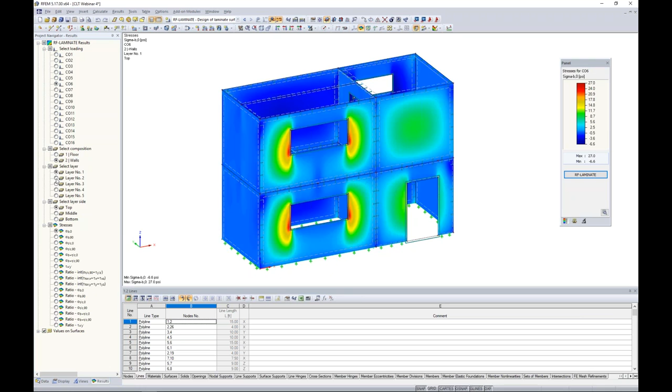In addition to that, we can view the 5 different layers. Remember, we have 5 layers that compose these CLT panels, so we can view the stresses within each individual layer. Even more so, we can view the top, middle, and bottom of each layer. So very, very detailed when it comes to all of the information that we provide you within the results for RF-LAMINATE.

Then even more so, here are all my stresses available to me. We have bending stresses. We have some higher bending stresses where our openings are. This makes sense. We can view tension and compression, shear, and so on. Then all of our ratios will be available for these walls, fairly low ratios.

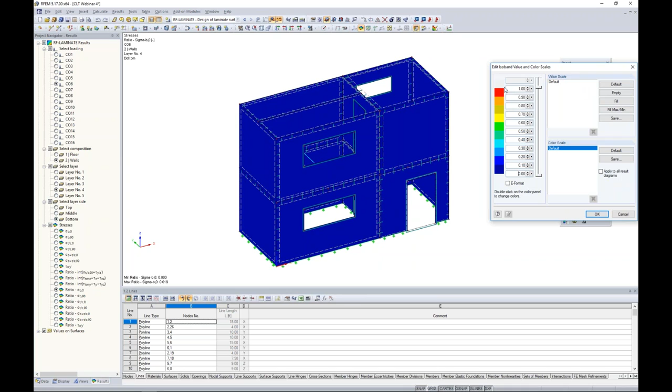Now, keep in mind for any of these checks here, we can always adjust our panel by double clicking on it, and maybe we're interested in any ratios that are 0.4 and lower. We can fill this in, we click OK, and then automatically the program will adjust those ratios based on our new panel here.

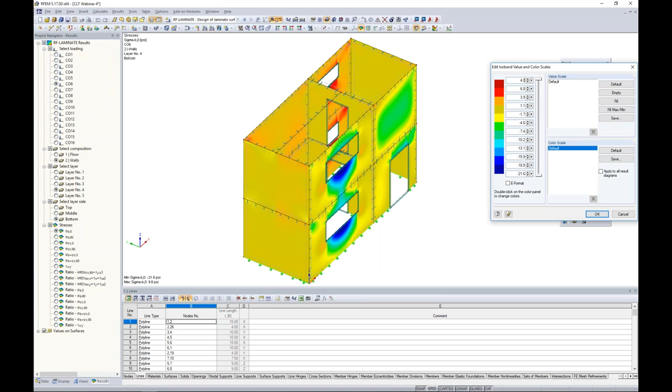This one actually might be a better example. We can change these stresses here. Maybe we're not interested in 9.6, that's a little too high, but maybe we want 4.0. We choose the fill button, we click OK, and now we can see how that panel was adjusted here.

All this information can be printed out directly to the printout report. You can choose mass printing, so that way we can print off all of these load combinations at once, for example, the bending stresses, added to the printout report, and then you can print that off either as a PDF or to your printer. So that's essentially CLT design within the program, including RFEM, the main program, and the add-on module.